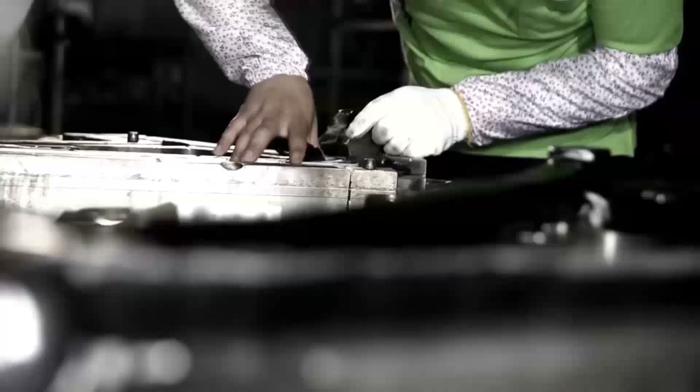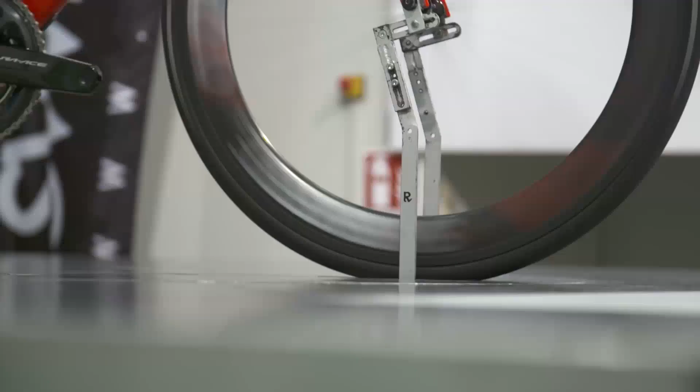So what's the big deal with Aero road bikes? It's a good question. Wind resistance, or aerodynamic drag, represents 70 to 80% of the energy a cyclist will exert when moving a bicycle forward. Basically, you have to push through the air to move forward. The more resistance you have in the way of material that causes drag or makes moving through the air difficult, the more effort you have to exert.

The truth about any sort of competitive cycling is that it is a game of numbers, and these numbers are measured in watts expended. It's all about energy efficiency. Aero bikes are more energy efficient and therefore provide a performance advantage when ridden. You can go faster for a longer period of time with less energy used.

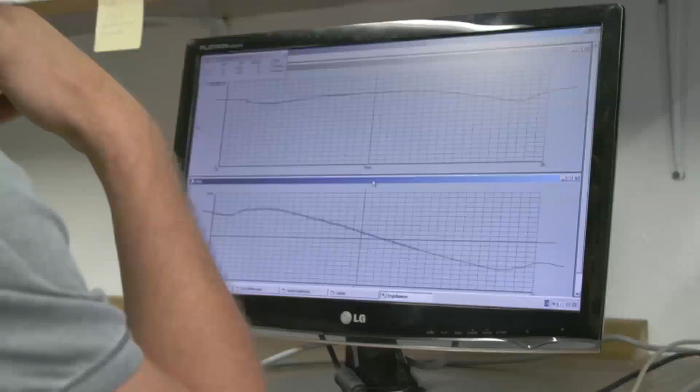The Pro Peloton is full of Aero road bikes now. The only days you'll not see Aero road bikes on the major tours are the stages with the most climbing. The theory here is because it takes more material to make their elongated teardrop-shaped tubes, they are heavier than skinny round tube bicycles. The idea is that on climbs with grades of anywhere between 5 to 7%, weight plays a bigger role in saving precious wattage than aerodynamics.

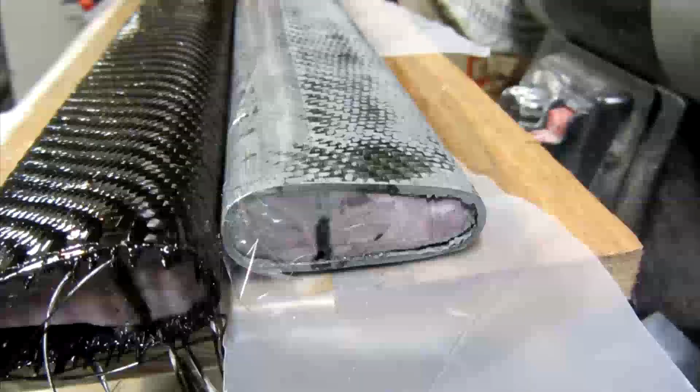When you consider that with improvements in carbon bike materials and design, this weight difference in many cases is a pound or less, I started questioning this logic, which is one of the things I discussed with the founders of Eagle when I interviewed to become an Eagle ambassador. Case in point, I cycled the full Ocean to Summit Haleakala course on my Eagle Z3.

Haleakala is the world's longest continual uphill paved course. It's 36 miles from ocean level to 10,023 feet. I specifically chose the Z3 for its aero features. My theory was that on a course where the wind can often reach 20 to 30 miles an hour once you clear 8,000 feet and are above the tree line, an aerodynamic bicycle would perform better than a super lightweight bicycle. With an average grade of 7%, Haleakala was the perfect proving ground for the aero bike versus the lightweight bike argument. My theory proved solid.

The Z3 handled that climb like a thoroughbred climbing bike. When you look at the overall design of the aero bike, it borrows much of its architecture from the most pure racing machines in the cycling universe, the time trial bike.

Time trial bikes, or TT bikes, are singularly focused on providing maximum aerodynamic benefit and pedal response to cyclists on a short course, typically anywhere from 40 to 80 km or 25 to 50 miles. TT bikes are not known for responsive handling, comfort, or ride quality.

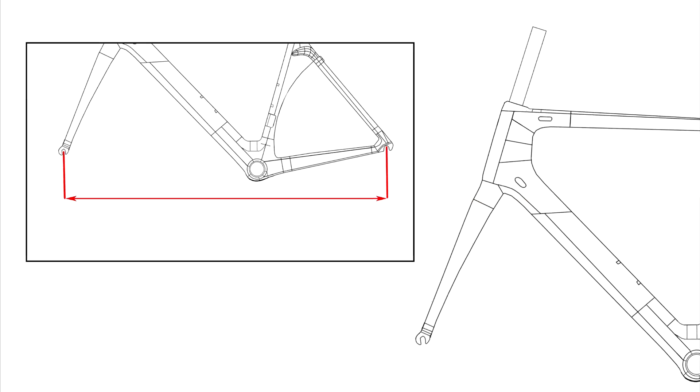The Aero road bike is a hybrid between the proven speed-oriented architecture of the time trial bike and the more rider-friendly setup of a road racer. TT and Aero bikes feature tight geometry with shorter wheelbases. The rear wheels are often tucked into the frame to provide aerodynamic advantage, but this also helps with power transfer.

The shorter the chain stays, the less flex you get when you increase pressure to the pedals. This translates into a quicker acceleration response. Another important feature of the time trial or Aero road bike is that by reducing the wheelbase, you shorten the frame, meaning less material is needed to build it, keeping the weight down as much as possible.

So let's talk about weight for a moment. If you're a professional cyclist thinking about this bike, or an active amateur involved in club racing or the occasional triathlon, it weighs in at the same range as the top shelf bikes by any number of household recognized brands. Configured as my bike is, with a non-stock seat, crank, bottom bracket, and stem, and including Garmin Vector 2 power meter pedals, which are about twice the weight of standard lightweight racing pedals, my bike weighs in at 17 pounds 3 ounces.

I'm 6 foot 2 inches tall, so I'm riding the largest frame that Eagle makes, which is 59 centimeters.

Let's look at what makes the Eagle Z3 a stellar choice for competition or for being king or queen of your local bike path or bike lane. Eagle designed and manufactures the frame, rims, and handlebars for the Z series bicycles.

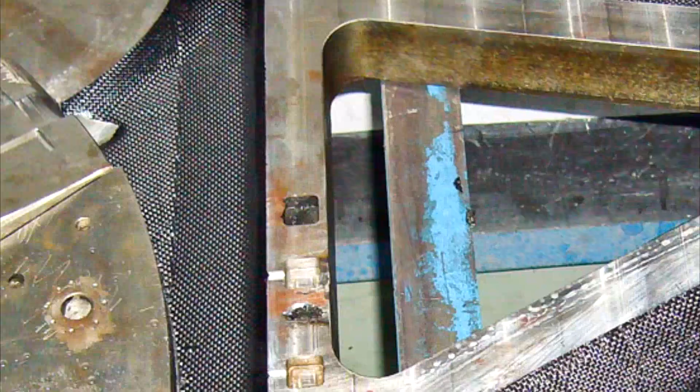These three core components form a system of aerodynamics which lends directly to pedaling efficiency and wattage savings. Eagle components are lightweight yet strong and durable. They feature construction with industry-leading ballistic quality carbon fiber.

I can attest without any hesitation that these bikes are built tough. My Z has been banged around in ways I honestly don't like to see bicycles treated, and it has held up like a champ. Other than a few minor paint and clear coat chips, nothing has caused any structural damage to this bicycle. And this includes thousands of miles of travel by air, car, and van.

The Eagle Z3 frame features the industry-leading BBright asymmetric bottom bracket set for the Shimano BB86 press fit standard. It also features robust chainstays which are extremely rigid. This means that the slightest amount of extra force applied to the pedals instantly translates into acceleration. You can feel an immediate response when it's time to sprint.

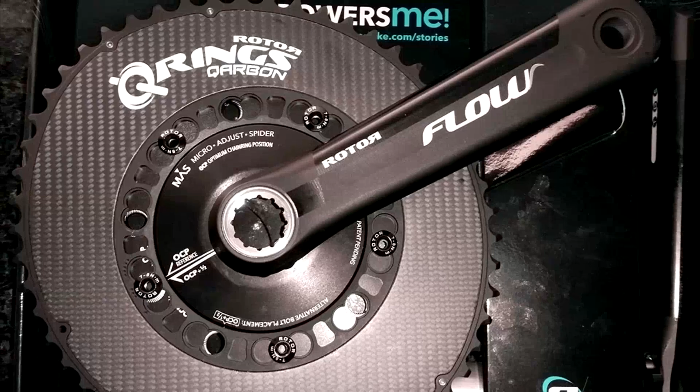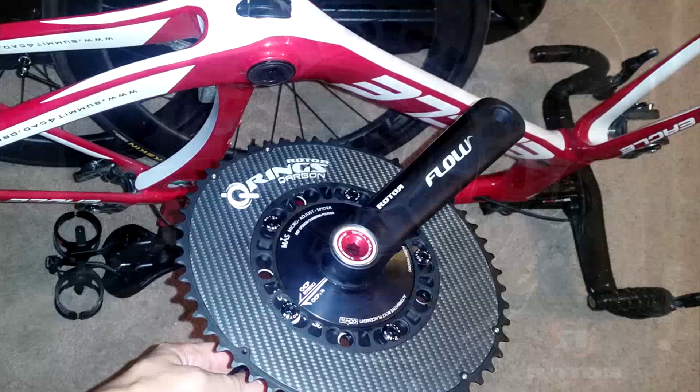Because Eagle chose the BB86 standard, there are plenty of world-class performance bearing, crank, and chainring options for the Z. I replaced the Shimano bearing set that came standard with the bike for a set of hybrid ceramic steel bearings by Rotor. I also installed a Rotor Flow aerodynamic micro adjustment spider crank and Rotor carbon Q ring chainrings. This bearing and crank switch out was simple, uncomplicated, and quick.

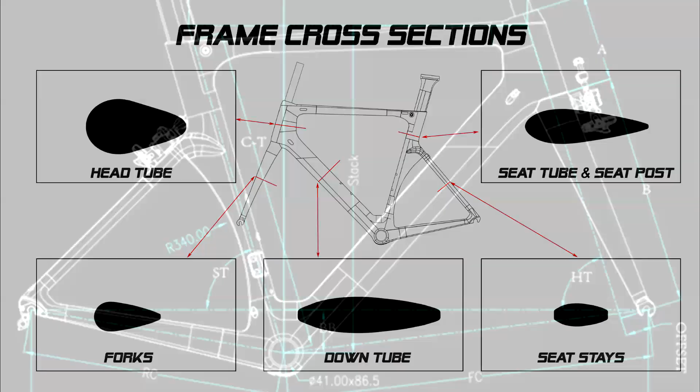Eagle has created a new frame which features overall architecture, tube shapes, and component integration that rivals the most advanced bicycles available. Each surface of the Z is designed to cheat the wind and save you important wattage. This is where the frame, rims, and bars come together to form a system for aerodynamic advantage without sacrificing handling control or ride quality. So let's talk about these components.

Eagle's airfoil-shaped carbon aero bars are simply brilliant in how they slice through the air. They provide an extra 4-watt advantage on a 40K ride, but they also feel amazing. They have the perfect balance of shape and functionality. With a comfortable drop profile, they also feature a large, wide top profile. And it doesn't matter where you need to rest your hands, there's always a comfortable surface available. Add that they feature internal cable routing and an integrated computer mount, and you've got the perfect cockpit at your fingertips.

Eagle Carbon Performance rims have all of the aerodynamic and weight-saving features of top-shelf rims that cost twice as much. They feature precision, lightweight, straight-pull hubs, aero-bladed spokes, and a wind-defying toroidal design.

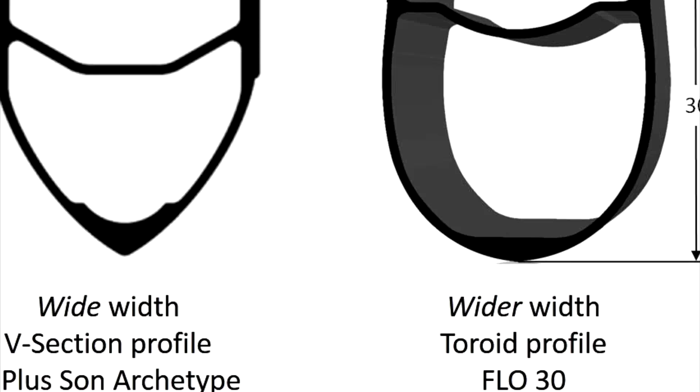Deep dish aero rims are notorious for control issues. If you hit a strong crosswind, some of these rims work like sails. They'll blow you off course, and they'll cost you important wattage through having to fight to keep back on track. These rims have a unique cross-section design which avoids the sail phenomenon.

The last feature I'd like to discuss is comfort. The Eagle Z3 is the first performance aero road bike I've been able to ride for more than 25 miles without a sore back or other annoying body aches. This is the first aero road bike I've ridden that didn't make me feel as though I'd been beat up by the road after 50 miles at my best pace.

I've actually ridden this bike as long as 6 hours, and I've done several 100-mile plus rides on it. I look forward to riding this bike every day.

I've talked about what makes this bike an outstanding choice for the cyclist who wants performance without compromising comfort or ride quality. But let's talk about the most surprising aspect of these bikes, their cost. Eagle sells their bikes direct. This means that there's no middleman and there's no retail markup.

The model that I ride, the Eagle Z3, also comes equipped with Shimano Ultegra Di2 electronic shifting. And yet, with all the advanced tech found in the design and the construction of the bike, its cost to you is only $3,999.99. So, just to make it simple, round it up a penny, it's $4,000.

Likewise, the people at Eagle, based right here in the United States in Florida, are friendly, helpful, and passionate about what they do. Eagle is comprised of professional triathletes and cyclists who are now designing and building bicycles for you. It really is the best of both worlds.